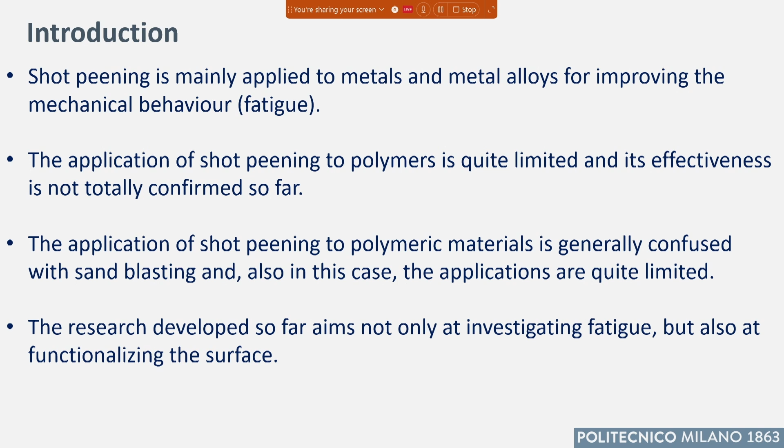Let's see some of these papers I mentioned. I will scroll through some of them. This paper comes from Italy, from Bari, published less than 10 years ago. What is the aim of this treatment?

They are considering soft blasting on a polymer. They have considered different parameters for sandblasting, and the media they use are particles of sodium bicarbonate.

Sodium bicarbonate used for soft blasting is soluble with water, so it's used sometimes for this kind of finishing treatment if you want to avoid any contamination, to avoid particles remaining on the surface. In this case they use sodium bicarbonate to change the functionality of the surface.

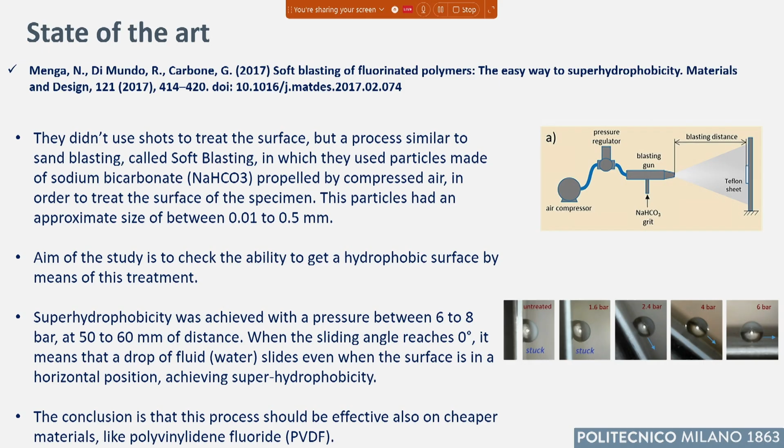That is, if a drop of water is put on the surface, it does not spread along the surface but remains self-contained, with an angle with respect to the surface larger than 150 degrees—this is the super hydrophobic surface. This is interesting because many treatments used to obtain a similar result involve chemistry and chemical processes. This seems to be a quite simple process to obtain a surface behavior like this.

Okay, another paper that has been published is this one. Here we are considering shot peening for polymer and for fatigue. This is more similar to also the sample you see, the geometry is similar to the metal parts.

But anyway, this was an attempt to apply shot peening for improving the fatigue strength. Different peening parameters were used. In particular, the parameter used this time was the time, from 5 to 20 minutes, in a wheel peening machine.

The result finally said that if you consider fatigue, the peening treatment is able to improve the number of cycles before failure. The degree the treatment is able to do that is related to the peening parameter and the time, and the best results were obtained with the yellow curve, with longer treatment.

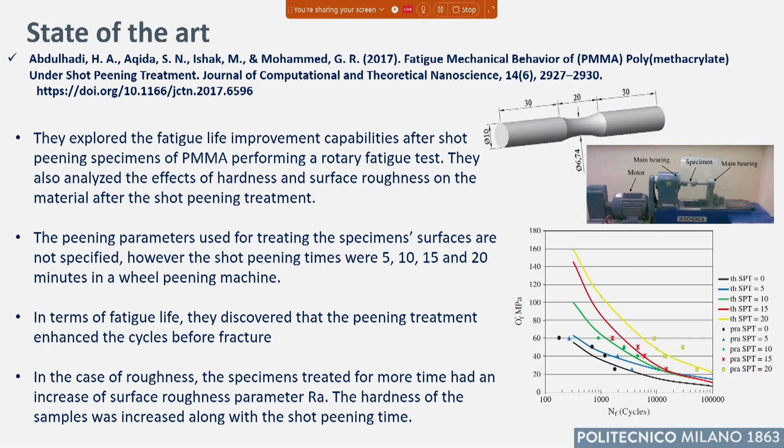This is another application, wettability, here is fatigue. Here what they are doing is considering additive manufacturing, fused filament fabrication process, and they are using shot peening during printing. After 3-4 layers, they stop, they peen one layer, the blue one, and then they proceed.

In this way, they are performing something like an in situ treatment, to discover if there is any mechanical enhancement or improvement when the FFF is used together with shot peening as a hybrid manufacturing method.

How they have measured the improved mechanical property of the peened sample, the blue, is by changing where the peening has been done. Here you see the hybrid sample by considering impact test. So we have a tower, an impact, an accelerometer, and then we measure the energy and the deformation developed after the impact, and by means of the accelerometer we are able to characterize the nature of the impact.

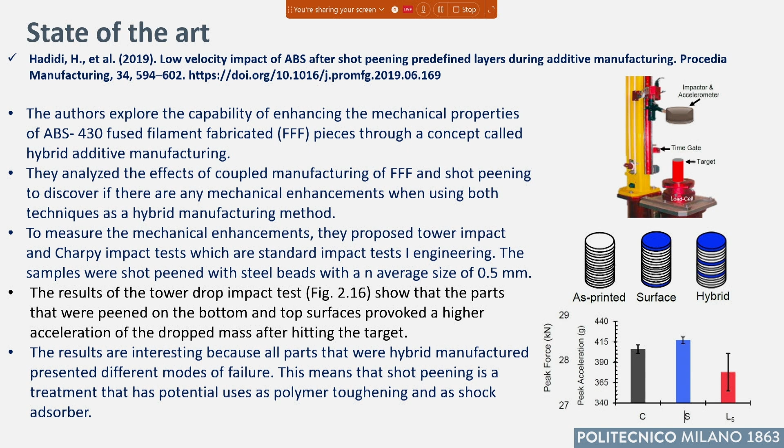Is it good, is it bad? Well, it depends on what we want to obtain and which is the application. For this application, they were interested in low velocity impact of this ABS process material, and then it's probably good. From a more general point of view, it depends. Anyway, this is another original application of shot peening.

This is another paper, published in 2019, about the effect of shot peening and solidification on fatigue properties of epoxy-based composite material. So this is not a plain polymer, this is a composite material, and here shot peening is applied with respect to fatigue.

How is shot peening performed? By using a wheel peening machine. The hardness of the shot was the usual one, 45-50 Rockwell C. The diameter is around 2.25 millimeters, and the speed is around 40 meters per minute, for 2, 4, 6, and 8 minutes, so by changing the coverage, let's say.

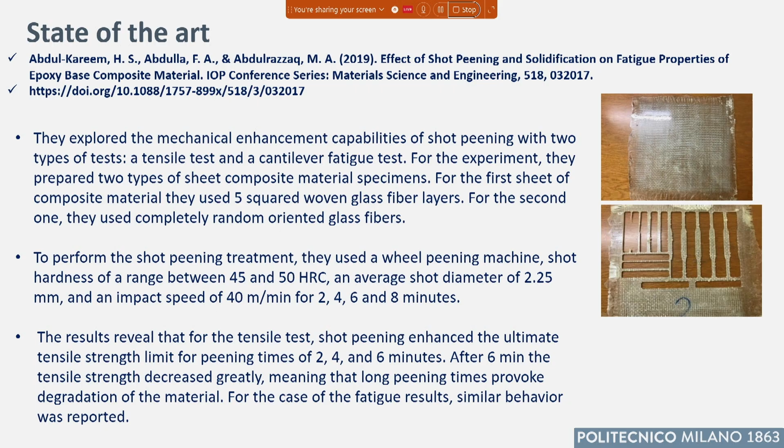And the results are these: shot peening is able to improve the tensile strength for the treatment with 2, 4, and 6 minutes duration. After 6 minutes, the strength decreases. It means that we are in the overpeening case for this kind of material.

The same can be said for fatigue. So by considering this paper, we see that also for this kind of composite material, we are able to use shot peening for improving the fatigue strength, but at the same time we should carefully manage the design of the treatment and its duration, otherwise overpeening is possible.

Here we are talking about laser shock peening for fatigue of a composite material. The composite material's matrix was unsaturated polyester resin, and the reinforcement powder was aluminum powder.

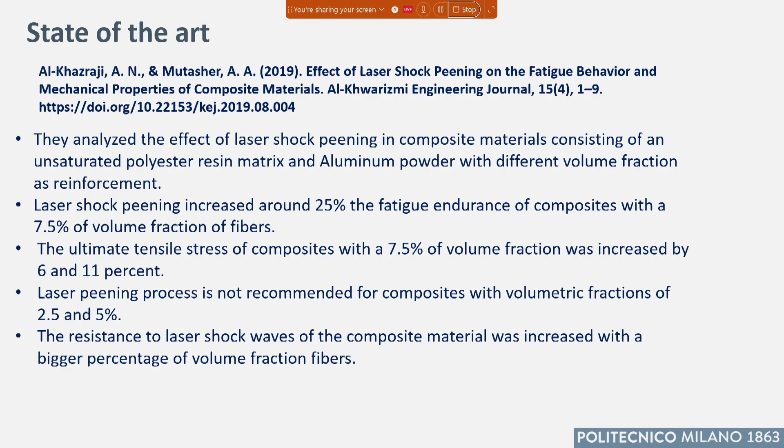Laser shock peening is able to improve the fatigue strength of around one quarter, 25%, when the volume fraction of fiber is 7.5%. The ultimate tensile test of the composite was also improved. The author also said that laser peening is not recommended for low volumetric fraction, that is 2.5 and 5%, because the laser shock waves induce a damage that is contained by increasing the number of aluminum reinforcement.

Here is another paper about wettability. This is in PEEK material.

They say that the change of surface is inducing an impact on the hydrophobicity of the sample, without mentioning the wettability angle.

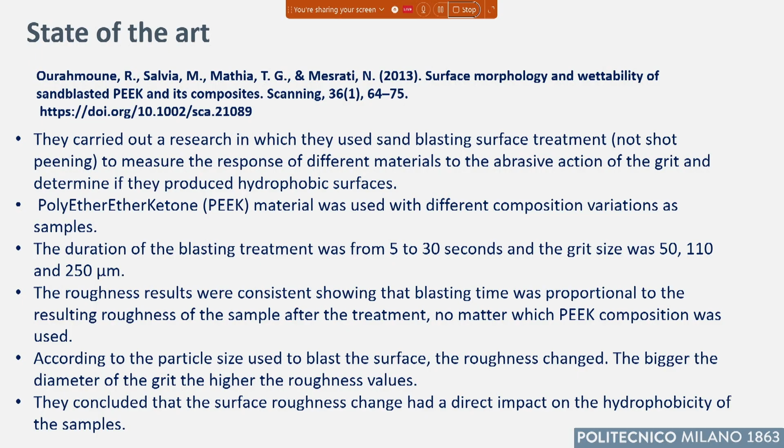Here we are talking about fatigue of composite fiber reinforced polymer in the form of laminate, and shot peening is improving the fatigue strength of this CFRP material. The fatigue strength of this composite material is increased by shot peening up to 65%.

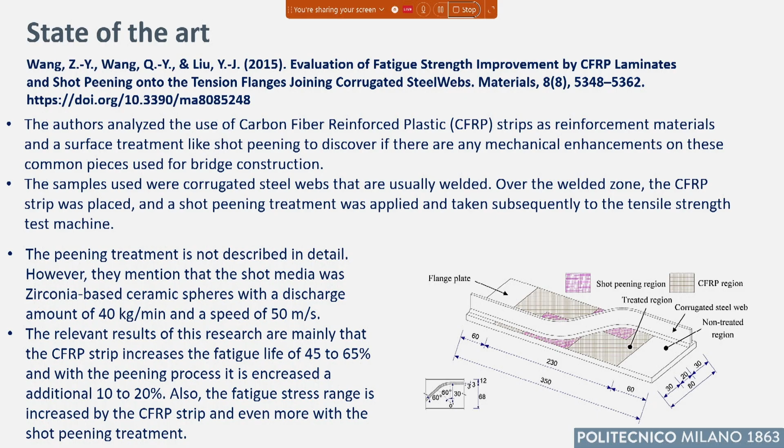With shot peening, even more, 10 to 20% improvement. So by means of the fiber, we are able to improve the fatigue and endurance by 50%, and shot peening is able to further induce another increment. It's confirmed that shot peening is able to improve the fatigue strength of composite material.

Here is another paper: effect of process parameters and shot peening on mechanical behavior of ABS parts, fused filament fabrication, static strength. They shot peen this ABS sample fabrication, and the effect of shot peening in this case is to reduce the UTS, but increase the ductility, elongation, and plastic deformation of the material.

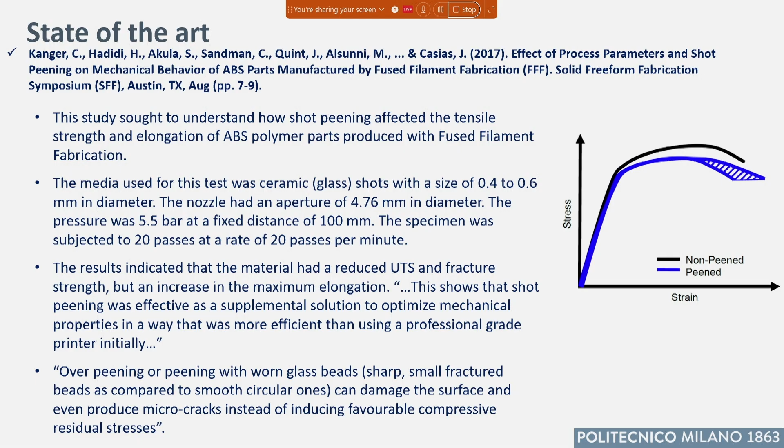What's happening? This other paper refers to the effect of process peening on tensile test on polymer, another process that is image projection stereolithography.

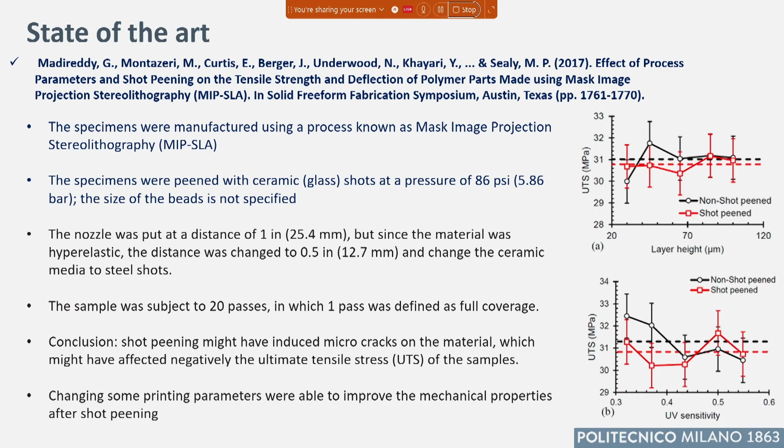There's the paper that you can find, one more, but I don't think more than 5 or 6 can be added. The amount of research paper is small. The other half is dedicated to application, that is impact strength, static strength, and from this we can also see that for polymer materials it's important to correctly select the right parameters in terms of shots.

So now let's proceed with the other part of the presentation. Here I'm talking about some results we have got from our research. In the field of polymer, we are not considering fatigue, but you can see here that we are considering some other aspects. Let me summarize.

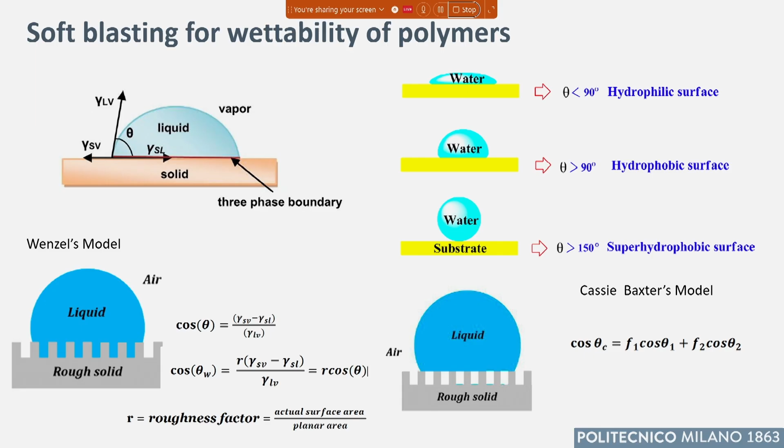That is to say the drops tend to remain self-consistent, self-contained. If the angle is even more than 150 degrees, it means we have a superhydrophobic surface. The models that describe this behavior are the Wenzel model and the Cassie-Baxter model: the Wenzel model describes hydrophilicity, and the Cassie-Baxter describes hydrophobicity, depending on the condition of contact between the liquid and the rough solid surface, and in particular the surface condition of the solid material.

And so what we have done, which experience have we done in this field?

Here you see what we have done with the materials we have considered: ABS, PTFE, PVDF, polycarbonate, and PVC. These are the mechanical properties of the materials, the tensile strength, and you can see there is a range of this property from 30 to 50 for ABS and so on. PC is the most resistant one, up to 69 megapascal in terms of UTS.

And then the Young modulus, also in this case, can have a range, expressed here in gigapascal. Fracture toughness is here, and yield stress is also reported.

What we do, the target materials are the ones you see. What are we using? Considering what has been found by a paper published by the University of Bari some years ago, we also consider sodium bicarbonate. Why? Because it is non-hazardous, low weight, soluble in water, and so it's easy to clean, even from rough surfaces.

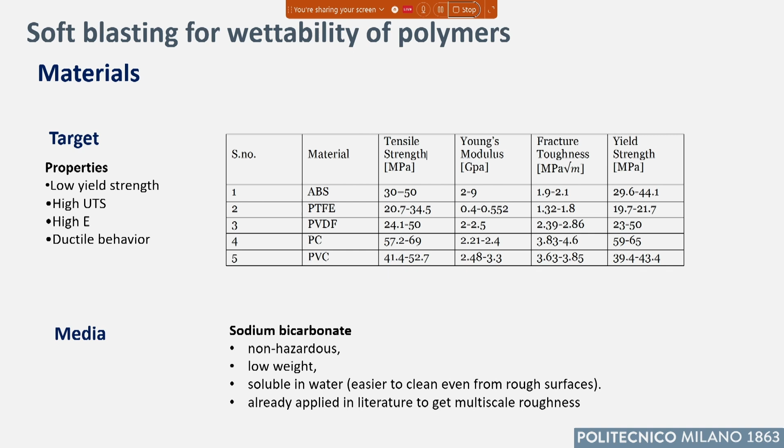Here is the experimental equipment that has been used. This is the sandblasting machine that we have used for the test. And we have designed and machined this tool where the direction, the inclination, is adjustable, so we can consider different impact directions on the material.

Here the sample is put and fixed, so we can consider also the angle of the direction of inclination for the impact as a variable for assessing the result. The other factors are the distance between the nozzle and the sample, the pressure of the media, and the time, of course.

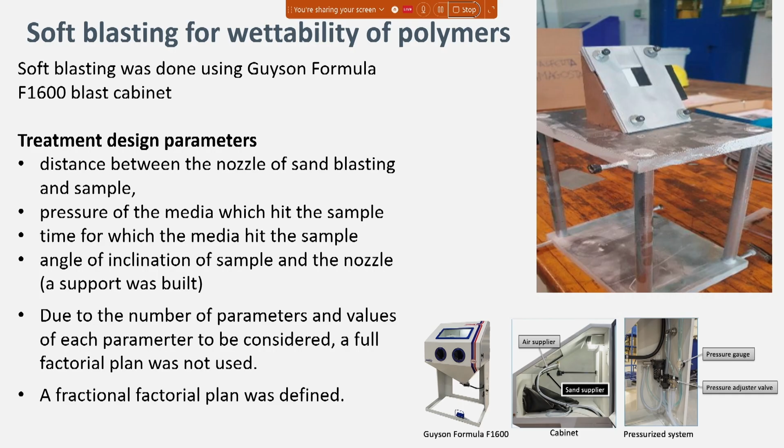We have a number of parameters, and a full factorial plan was considered too expensive and time-consuming, so we used a fractional factorial plan for developing the experiment.

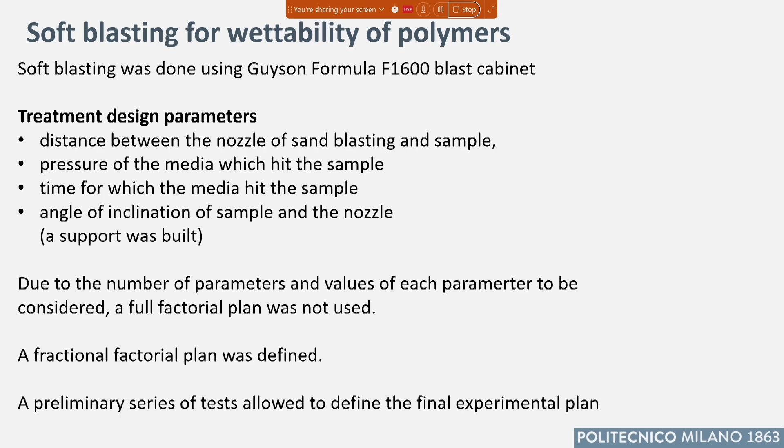This is a summary of what I have already said. A preliminary series of tests allowed us to define the final experimental plan. You can see here that the fractional factorial plan anyway includes a lot of experiments.

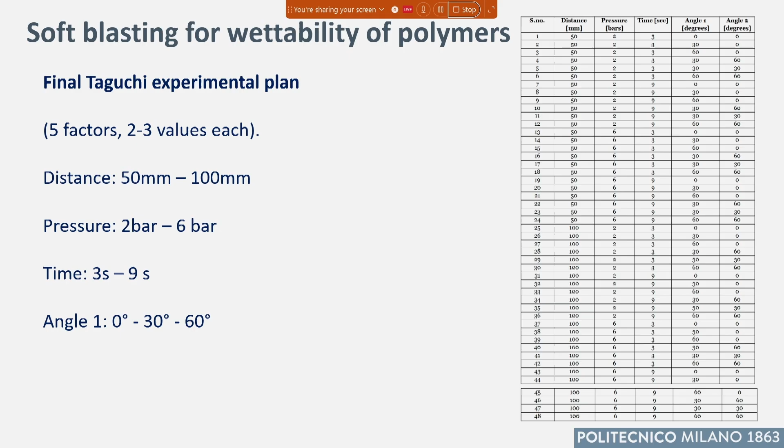That is 0, 30 degrees, and 60 degrees. Here we have angle 1 and angle 2 that define the other direction of the tool where the sample is constrained.

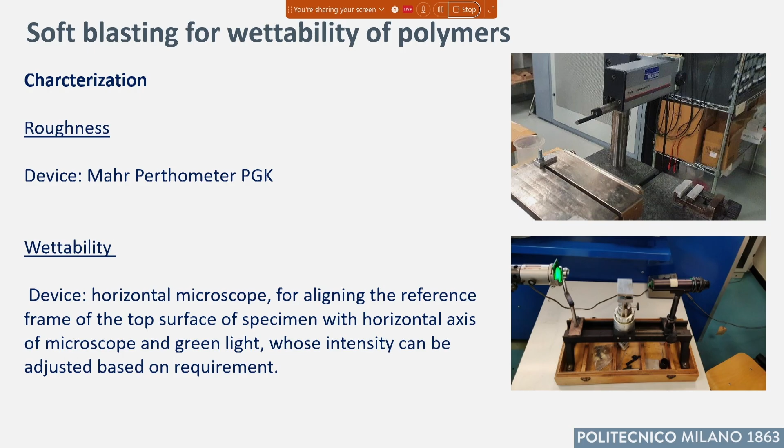The roughness was measured by means of this profilometer, and the wettability was assessed using an optical microscope, which was tuned in such a way to obtain an accurate value of this angle of the drop.

What is this? Here we are talking about the characterization. We see the distance, the different factors: distance, time, and pressure.

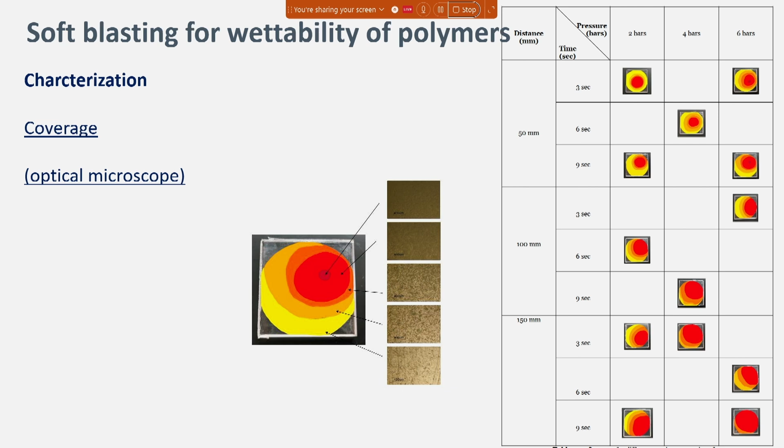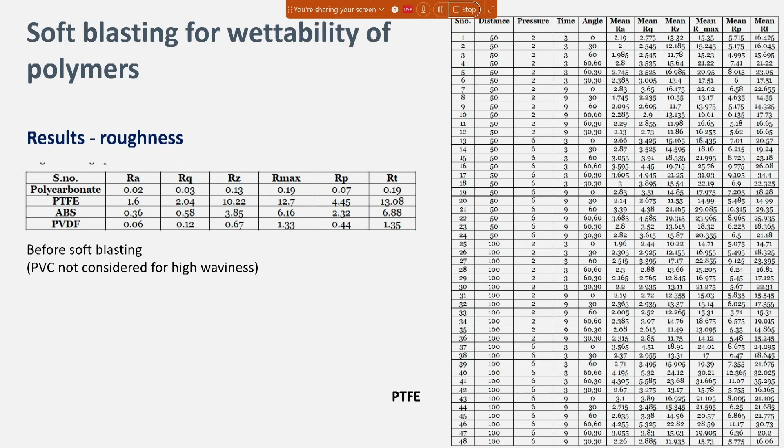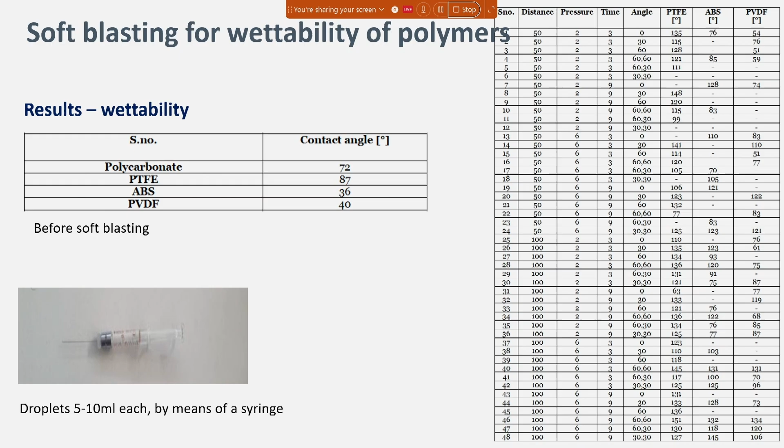The drop was arranged by means of this syringe, 5 to 10 milliliters each drop. And this is the test we did, for assessing the angle according to the different treatment conditions that we have investigated.

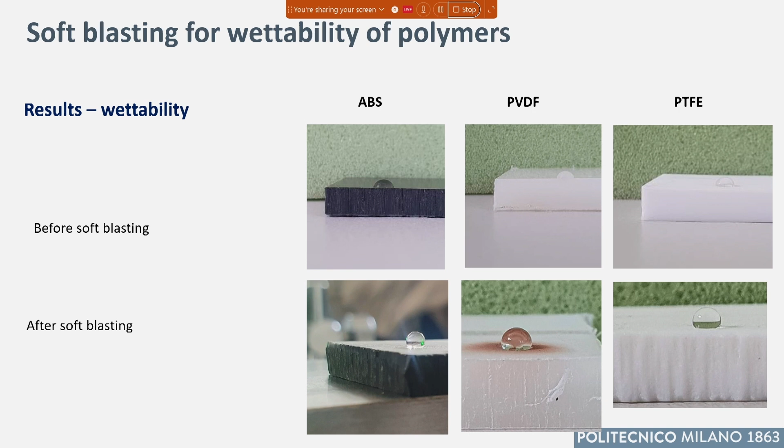And the results are these, considering the materials ABS, PVDF, and PTFE. These are the results before and after soft blasting. If we consider the situation before soft blasting, it can be observed that they are hydrophilic, that is to say the angle is clearly visible, less than 90 degrees. But after sandblasting, at least in this condition, the behavior is quite different. The behavior is hydrophobic, or could even be superhydrophobic, because the angle is around 150 degrees.

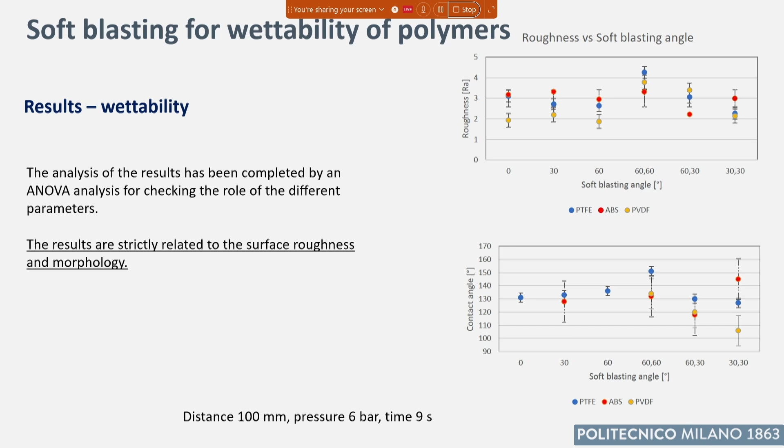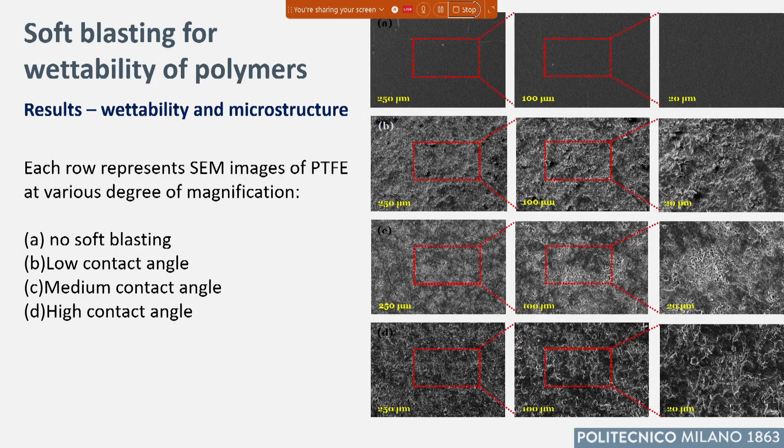Here we see the difference in the appearance and aspect of the surfaces. Row A is without the treatment, no sandblasting. Then by changing the contact angle—low, medium, and high—we see that indeed the geometrical features that define the surface are rapidly changing with the angle of contact.

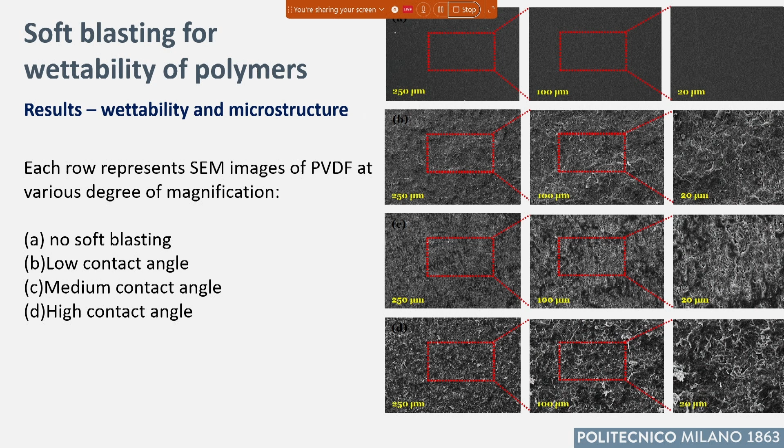Okay, how can we conclude? Indeed, this study confirms that by means of soft blasting, it's possible to obtain superhydrophobic surfaces. It's possible, first of all, to modify the wettability behavior of polymers, inducing a functionalized behavior.

Also in this case, a more accurate study on the treatment itself must be done to completely assess the relation between the treatment parameters and the final behavior in terms of wettability. It's not easy, because there is a huge number of parameters to consider, and the number of experiments we should run grows rapidly if we want to analyze all of them. From this point of view, an approach based on the application of training for AI, artificial intelligence, could help achieve good, accurate results while reducing the effort needed for the experiments.

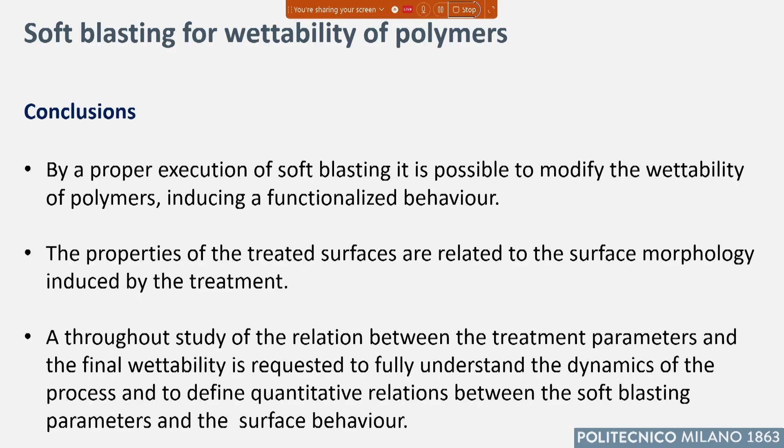So far, the complete dynamic, the full understanding of how this change of behavior is obtained and how it relates to the treatment parameters, has not been defined, and the quantitative relation between the soft blasting treatment parameters and the surface itself must still be found.

Anyway, the result is good, is of interest. The application of a treatment like this at an industrial scale can reduce the environmental impact of producing hydrophobic surfaces, and can even reduce the final cost of the process needed for obtaining similar results. Okay, any questions?

You're not interested in polymers? Oh, please, there is a question there.

Sir, when compared to metals, polymers have a different elastic behavior. When we apply shot blasting, even soft blasting, there is a tendency among polymers to undergo more deformation rather than work hardening, right sir? Yeah. In metal, preferably we'll have a work hardening phenomenon happening, but in polymers we might have a tendency for deformation when we apply intensity and similar things.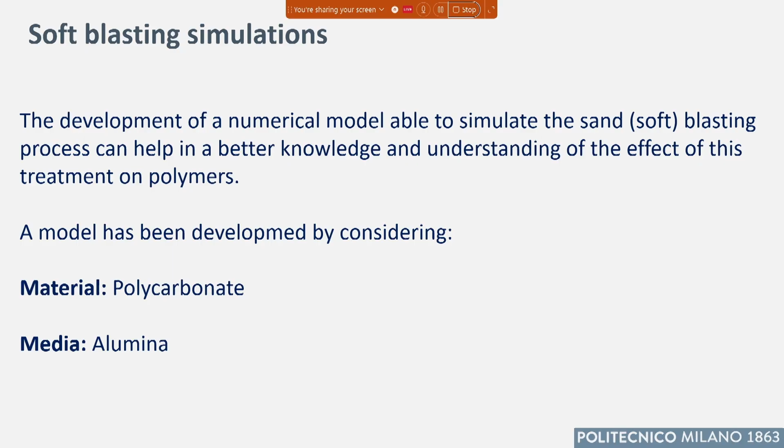The difference is the media. In shot peening we can consider regular media, the same diameter or very similar diameter - the media are strictly controlled. As regards sandblasting, we have a dimensional size range, let's say, but indeed the geometry is quite general, it's random. We are talking about sand in the end, so this is random.

So what I'm showing now is how we have considered this problem and how we have developed the simulation of sandblasting, with the good points we have got, and also with the limits that I will highlight. The material we have used, in terms of target material, is polycarbonate, PC.

The media are considered to be alumina ceramics. And this is the model we have used for describing the behavior of the material. Here you recognize the Johnson-Cook equation that considers the strain effect, the strain rate effect, and the temperature effect.

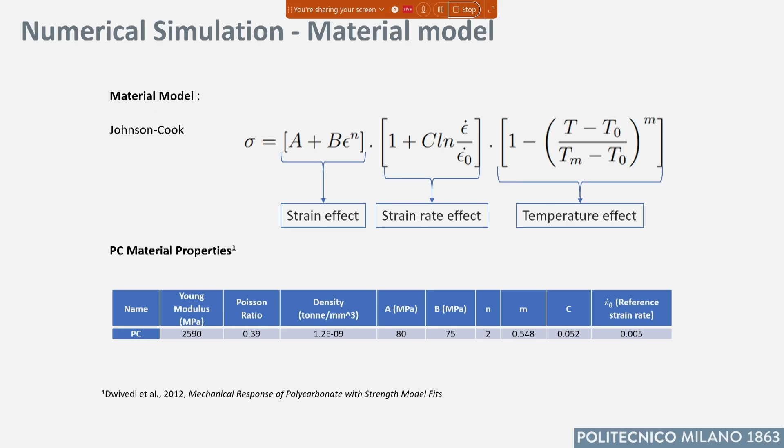The value of this Johnson-Cook law for polycarbonate were taken from literature, from a paper where this equation for polycarbonate has been proposed and experimentally applied successfully.

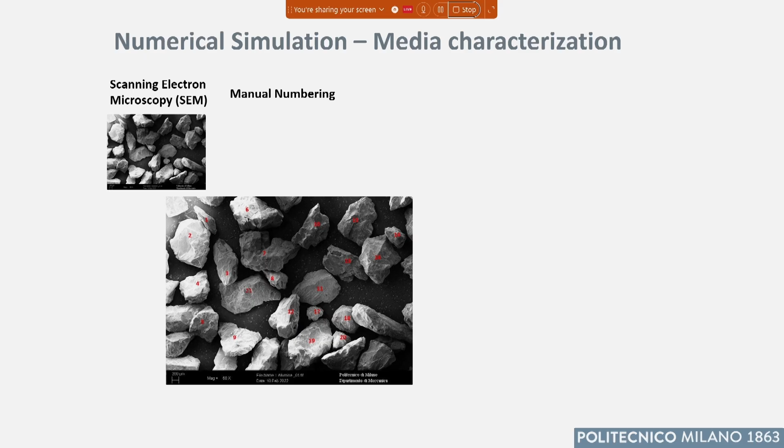These are some scanning electron microscope images of the sand, of the media. We see here that indeed the geometry is quite randomic.

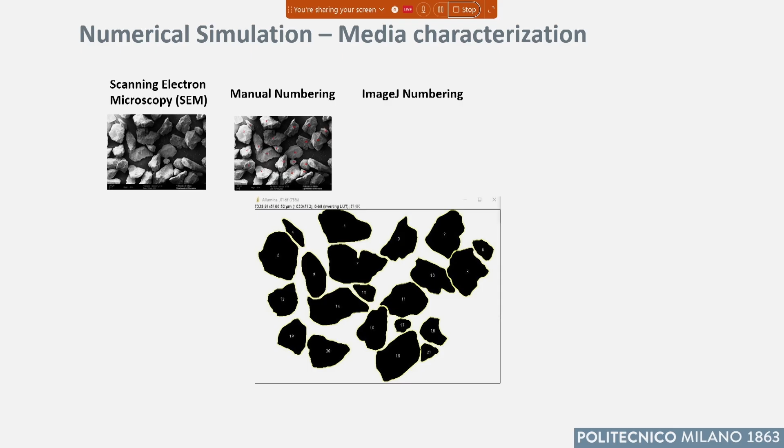So what have we done? We have considered different images. In a manual way, we have assigned a number to each particle in this range, and then we have elaborated the image with this tool into black and white images.

Finally, on the basis of the analysis of this image, we have schematized the possible geometry into 4 different target geometries, approximating the real case. According to what we found by this image analysis, we have 4 different groups: spherical, ellipsoid, rectangular, and triangular pyramid, that is this.

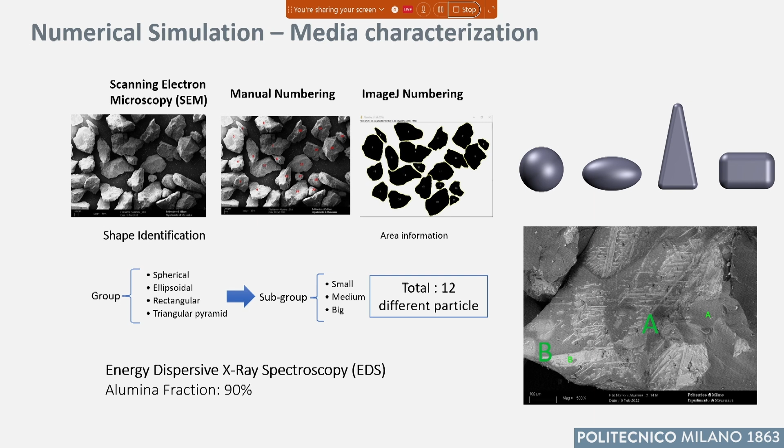And then for each group we have 3 different sizes: small, medium, and big. In total, we are able to simulate 12 different grains, 12 different sand media.

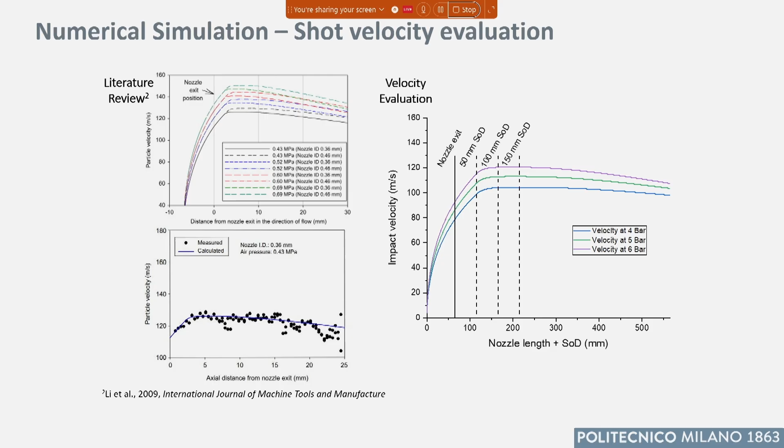What we can see here is some data about the shot velocity evaluation, taken from a paper published in the International Journal of Machine Tools and Manufacture. You see here the dependence with respect to the nozzle position and the distance from the nozzle, and here is the particle velocity in more detail. So this is the shot velocity evaluation.

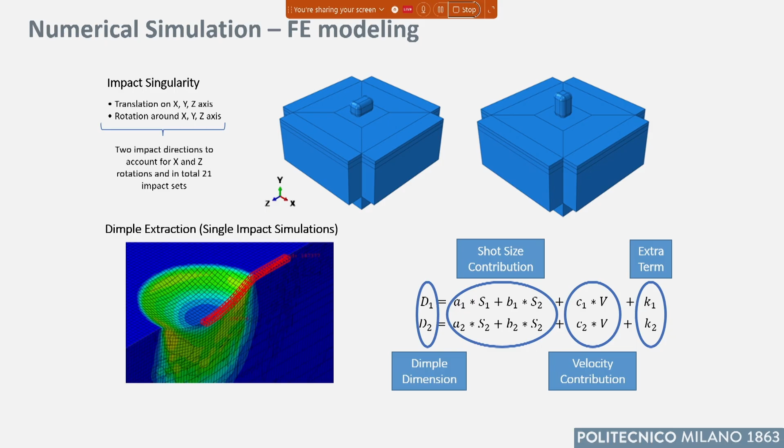These are the resulting PEEQ, the equivalent plastic deformation strain. This is by considering the different shots. Here we are evaluating the step time evaluation.

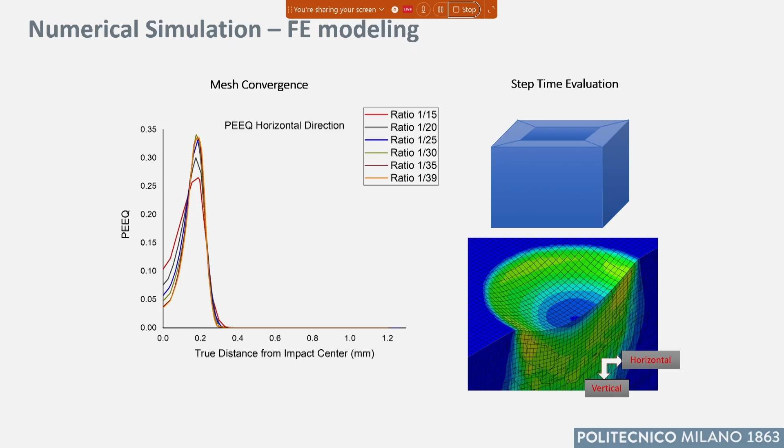This is the way a complete cycle is performed. Finally, if we want to reach full coverage, we have to apply the classical Avrami equation, which makes it possible to calculate how many impacts we need to consider 100% coverage. A Python code has been developed to assess these conditions.

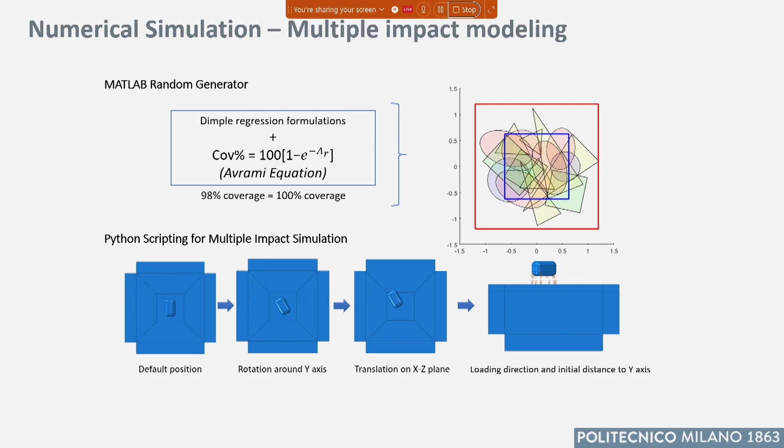Here is the element that we are using. The target surface was modeled using reduced integration hexahedral elements with 8 nodes. Also the shots were modeled with the same kind of element, reduced integration three-dimensional elements with 8 nodes each.

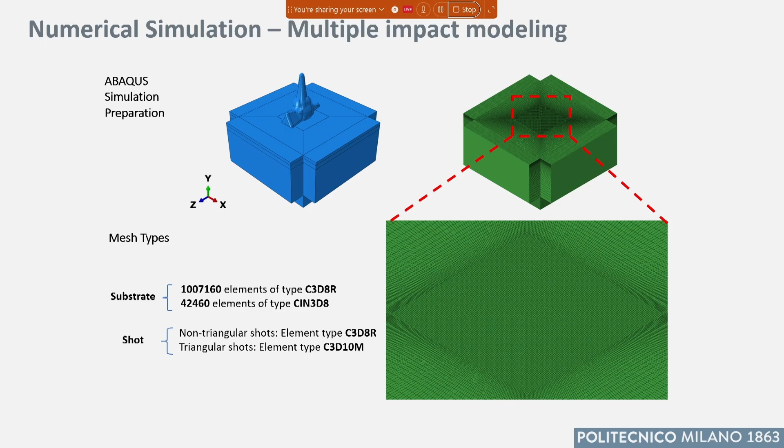Here we see the superposition of the different mesh types that we have considered. This is the enlargement of the mesh, of the central part of the mesh. Here we can see the deformed shape of the target surface.

Here you see the way we have filtered the points, following an approach similar to what we used for additive manufacturing, which we commented on yesterday. We have an original set of coordinates, then using the filtering tool we developed, we finally have smoothed data that respects the final roughness parameters, but avoids any possible singularity induced by the numerical deformation.

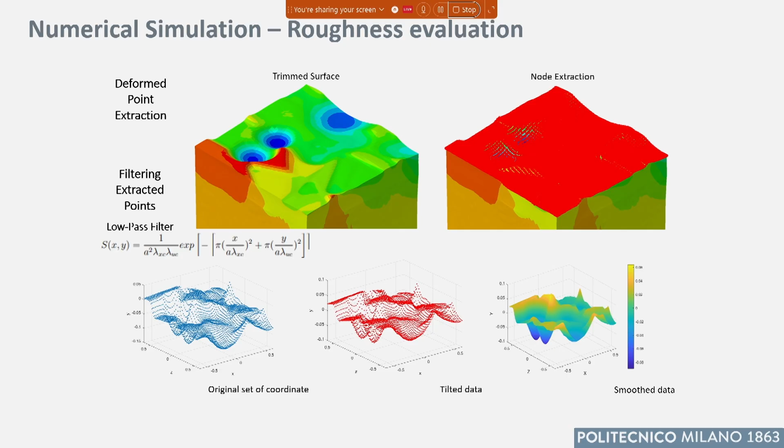Here we can see the role of the surface morphology. This is experimental, after the application of sandblasting at 4 or 6 bar with different grades of magnification. It's clear how the larger value of pressure induces more and more roughness and damage.

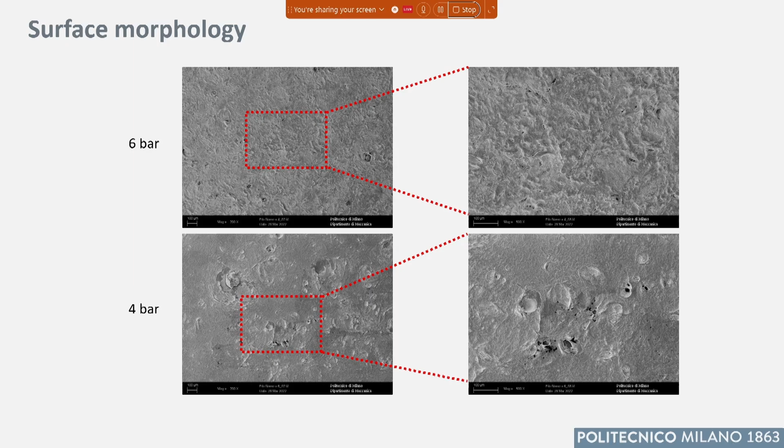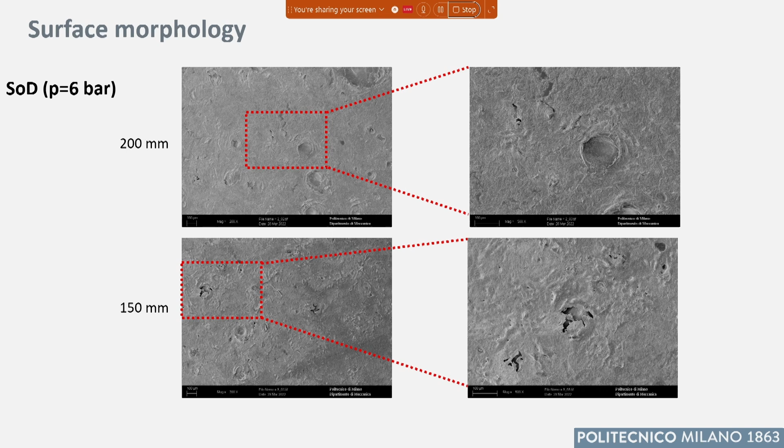Here is the effect of the standoff distance with the same value of pressure, 6 bar. Also in this case, it's possible to assess that if we go farther, the indentation will be less evident.

Okay, and now let's see the result. This result refers to polycarbonate, pressure is 6 bar, the standoff distance is 150 millimeters with 3-second impact time. Here we have the numerical simulation compared with the experimental one.

Okay, and we can see that the agreement we have found is satisfactory, let's say. In some cases it's closer, in some other cases not so close. In some cases the scatter is more pronounced, but anyway the trend makes sense. The trend is the same, let's say.

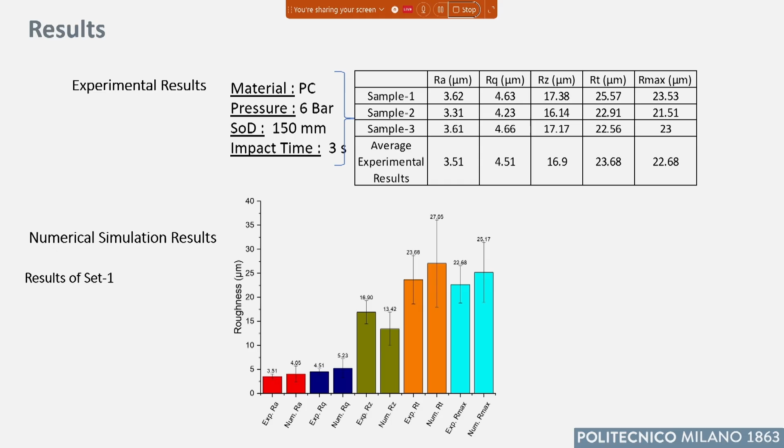I forgot to say that the experimental results reported in the graph are the average that we have taken by considering the measurement of roughness on three different samples.

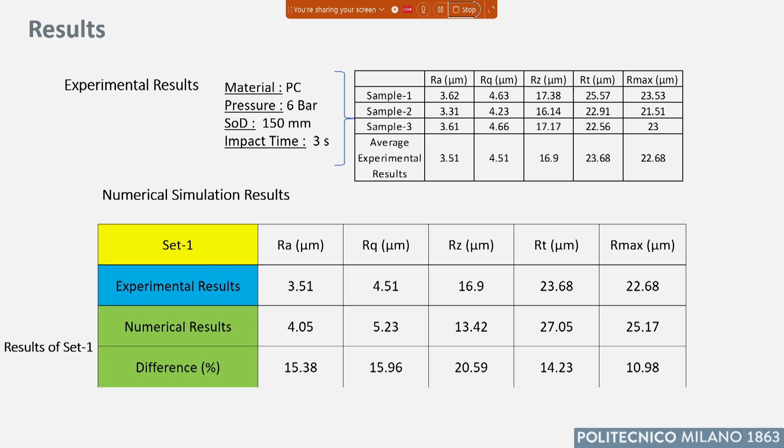And this is indeed the same result in a table. These are the experimental ones, and we see, to summarize, the result of set 1. So we have that the difference is between 10% and 20%, let's say. So we consider this result as satisfactory.

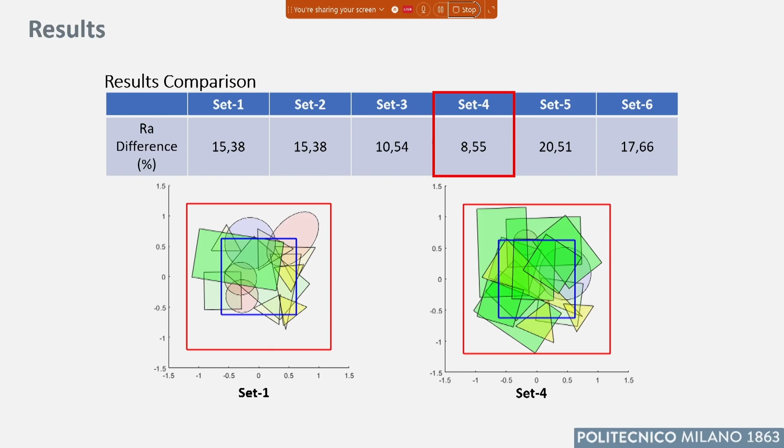There are other sets where other combinations, other sets of impact were also considered, and the difference of RA in this case, the minimum one, is something more than 8%. But anyway, whatever set we are considering for impact, in the end the trend remains the same, between 10 and 20%.

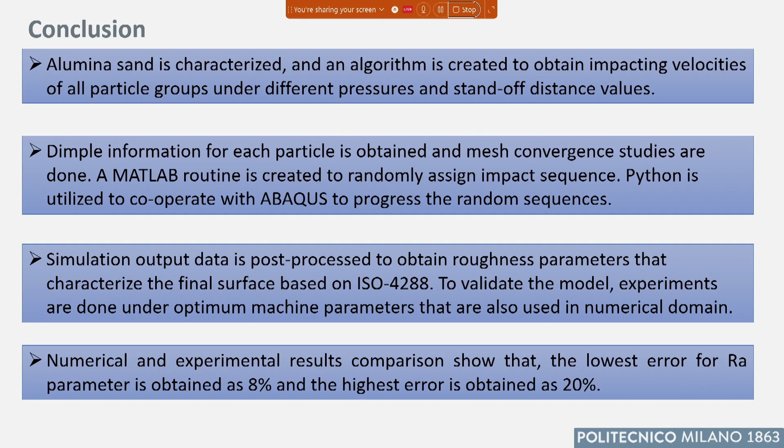Finally, what can we say? I show you this analysis just to show another way to simulate a process that is similar to shot peening, but from some point of view is even more complicated, especially due to the random distribution of the media. We are obliged to group the media in categorized geometry, let's say, and even if we do this approximation as an input step, the result we can obtain is still useful for design, correctly designing the treatment itself.

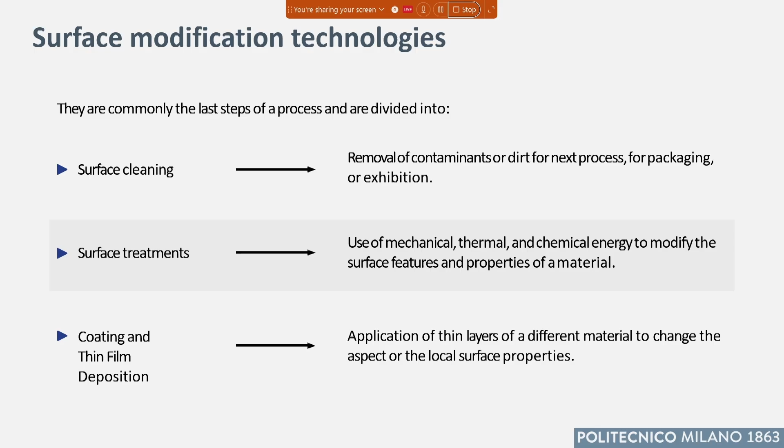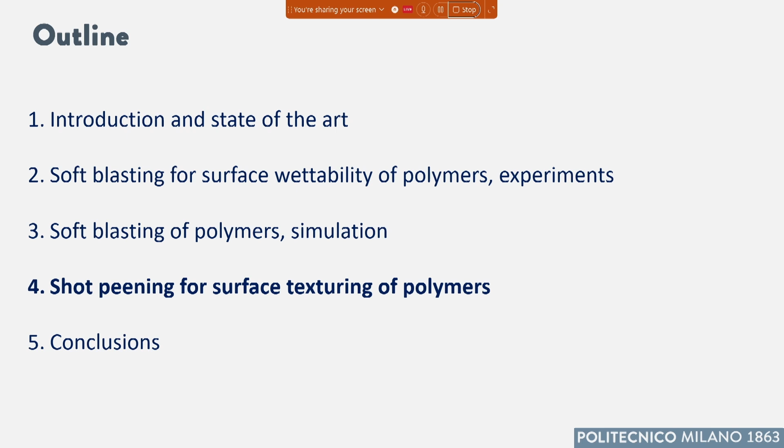Let's go now to the last part of the presentation, then I will close. Indeed, what I'm talking about now is a new way to apply, no more sandblasting, shot peening, not for fatigue, not for improving mechanical properties, but for changing the material's surface texture. The study was developed in cooperation with the Department of Design, meaning that the final result can be exploited from a design point of view. The application we will see in one of the slides comes from a student who was in design, industrial design.

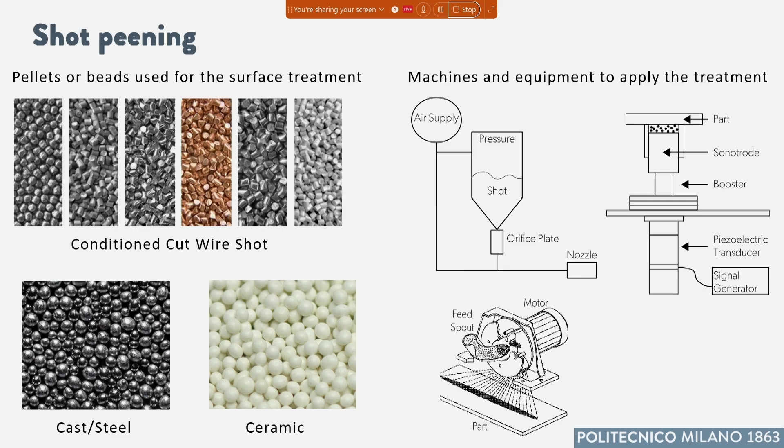Okay, let's see what we are considering now. We are talking about surface treatment, we are talking about shot peening. We know the different shots we can use: cast steel, ceramic, cut wire, and so on. This is the machine we can use for shot peening, but I don't want to stay on this slide since you already know it.

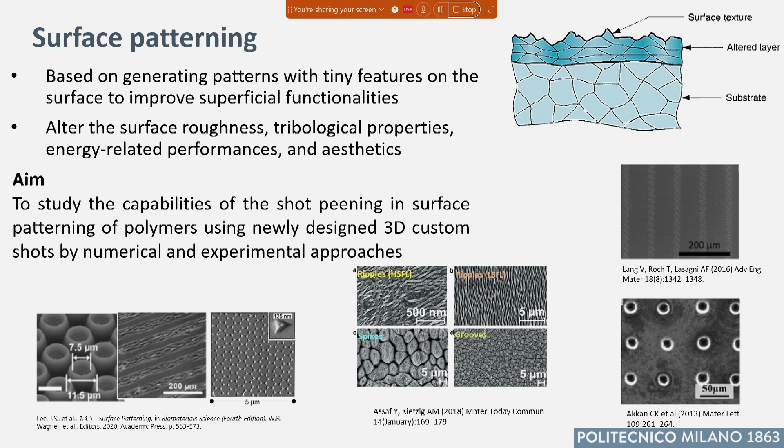What have we done? We are talking about shot peening, and we have defined a new type of media. No more a smooth sphere, like is done for usual shot peening or ultrasonic shot peening, but media with a surface pattern, obtained by using laser powder bed fusion or SLM, with a different pattern for each possible shot.

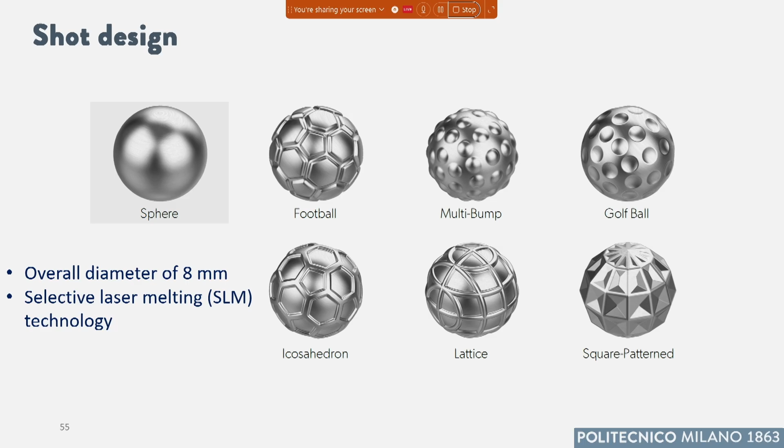So we have the sphere, smooth sphere; the football, because it reminds somehow the ball used in soccer; multi-bump; golf ball, it reminds the golf ball; and the other one, lattice, icosahedron, and so on.

The media were produced by using additive manufacturing. The diameter is around 8 centimeters. The smallest geometrical feature is less than 1 millimeter, around 0.1 millimeter. The reason we chose this geometry is that, considering also the designers, they assessed that the geometry could be able to produce an appealing surface. The material of the shot is still 316 steel, and for the target we must have this requirement, and in the end we chose an ABS.

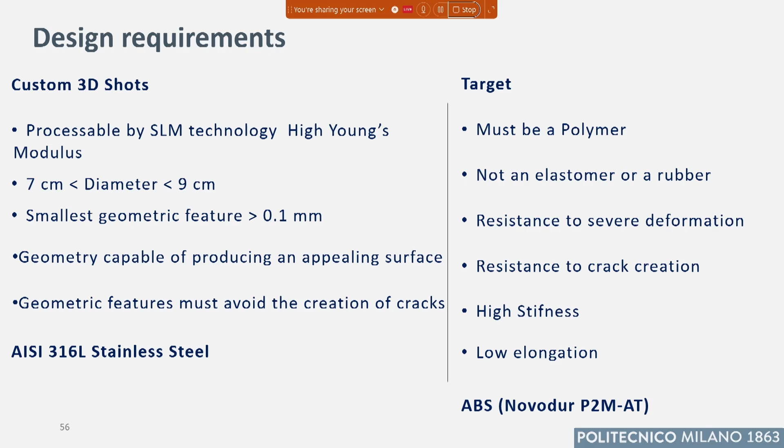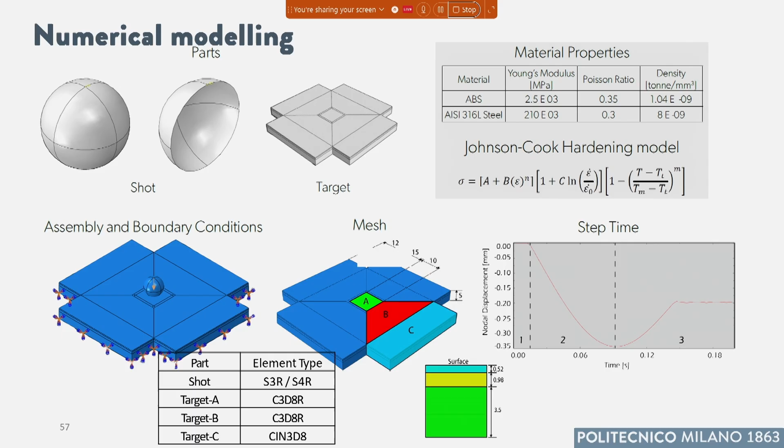First we model the problem. The way we have modeled it is similar to what we did in the previous study. We have the shot target material modeled the same way as before, using the Johnson-Cook hardening model for the material. Then we ran this analysis by varying the media and the coverage.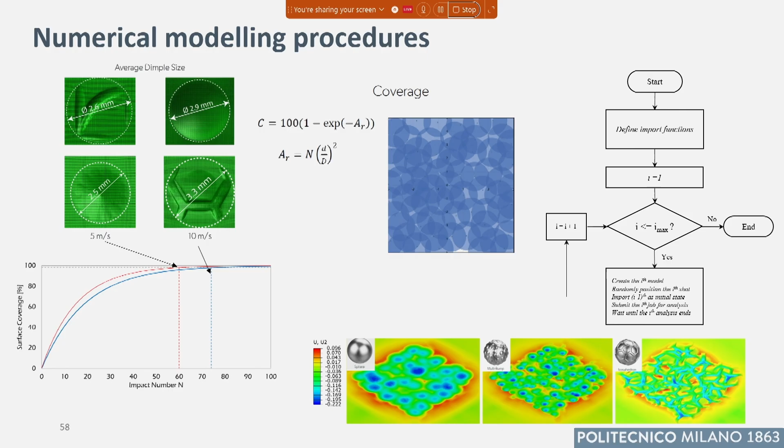This was not understood initially. If you consider a football media, the final surface pattern will be different with respect to a smooth sphere or a multi-bump sphere, and so on. So by playing with different media, we can also think to obtain different surfaces that can be used both from a functional point of view or even just for aesthetic application.

Here are some results with an impact speed of 10 meters per second considering the different media. This is the areal roughness parameter, SA, SQ, and SZ, among others. This is the same at an impact velocity of 5 meters per second, and here we have SA and SQ for some of the shots.

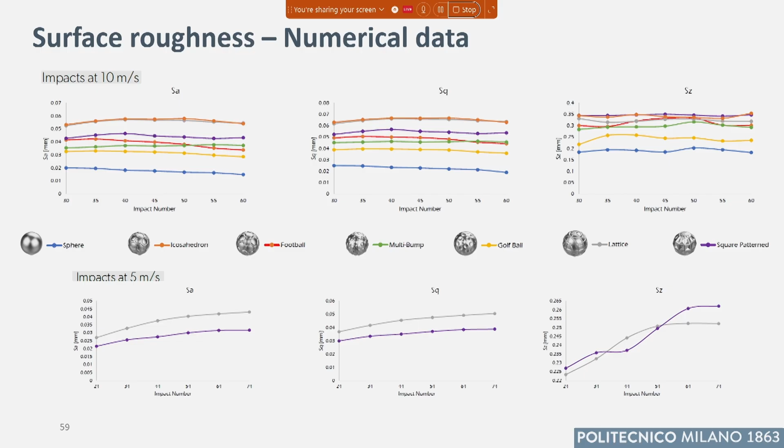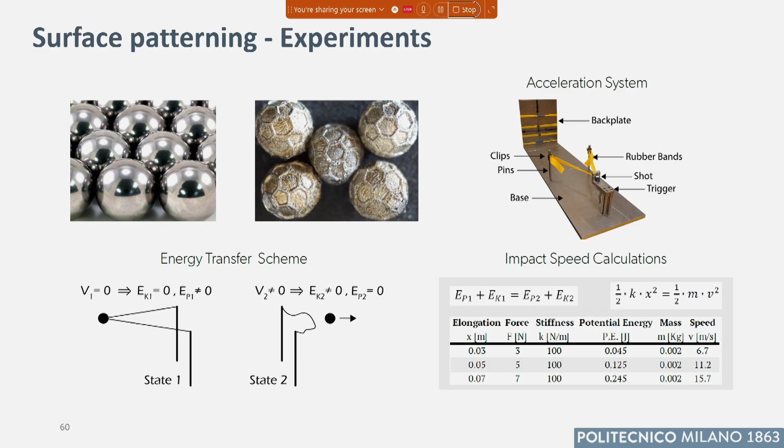We have also performed some experimental tests to compare with the simulation and draw some conclusions. We used a very basic equipment: an elastic rubber that we stretched, and by considering the accumulated potential energy, we estimated the velocity. Attached to the back plate is the polymer plate where the indentations are done, which we manufactured by additive manufacturing.

Experimentally, we see the evolution of the surface, and this follows quite well the numerical trend.

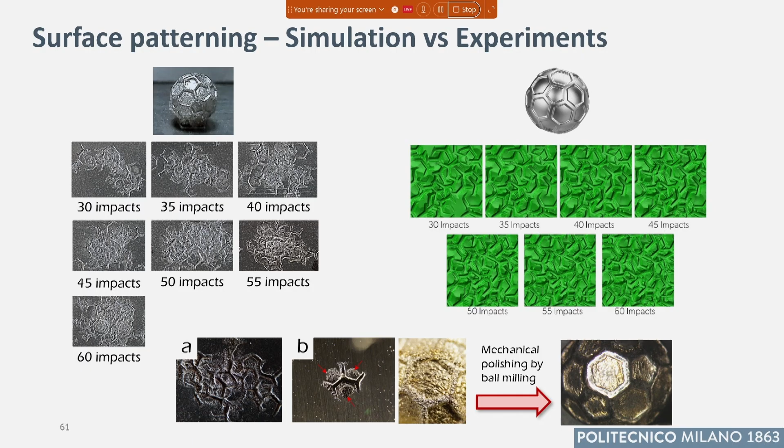Here are some results in terms of the unpolished media, and the difference is also observed. This image is not great quality, of course.

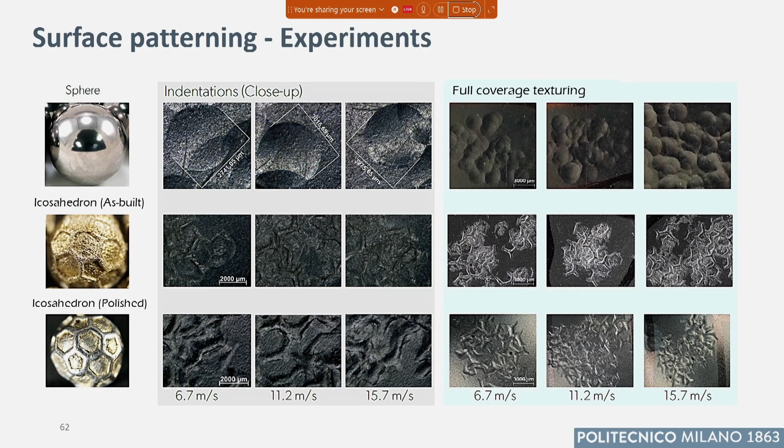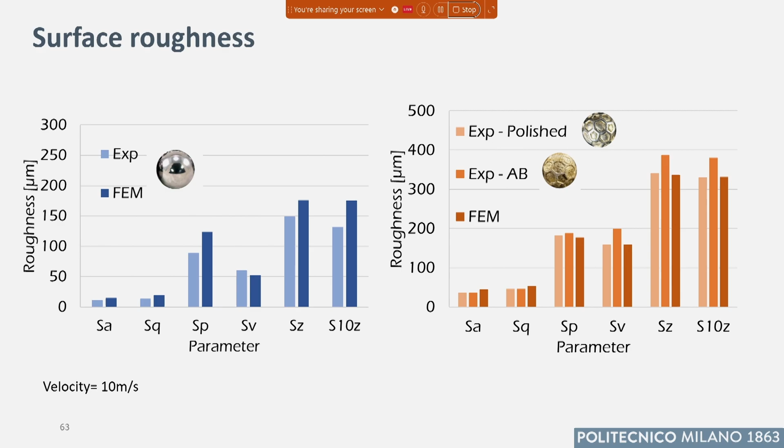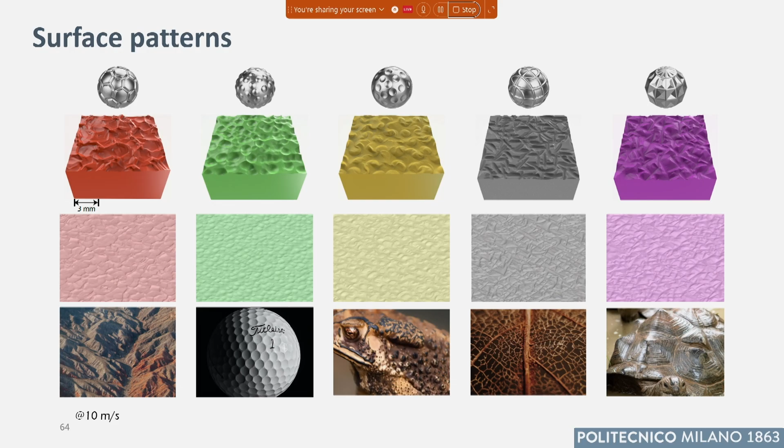Finally, the study is not finished yet today, but we obtain quite different surfaces. By means of media, we obtain customized surfaces, and each of them can be compared, let's say, with another natural surface. This is the golf ball using a multi-bump media, compared to other natural features, from a qualitative point of view at this stage.

What the design student who followed this project did was use this new shot peening treatment to design an object that everyone has on their desk: a cover for a cell phone. This is an application, but indeed the range of uses for this kind of shot peening could be quite large. We can use different materials to obtain quite different surfaces that can be used in daily life.

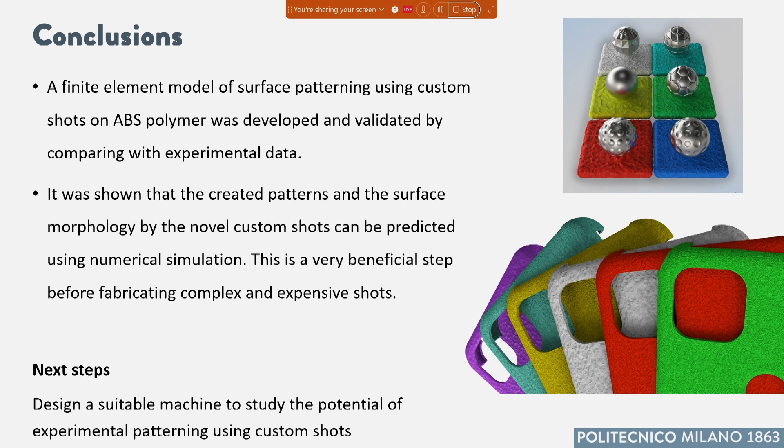When we talked about this study, a colleague had the idea to apply it to injection molding, because if we are able to imprint this on a part during injection molding, we could have a custom surface without any other treatment. It could be a way to produce personalized customization.